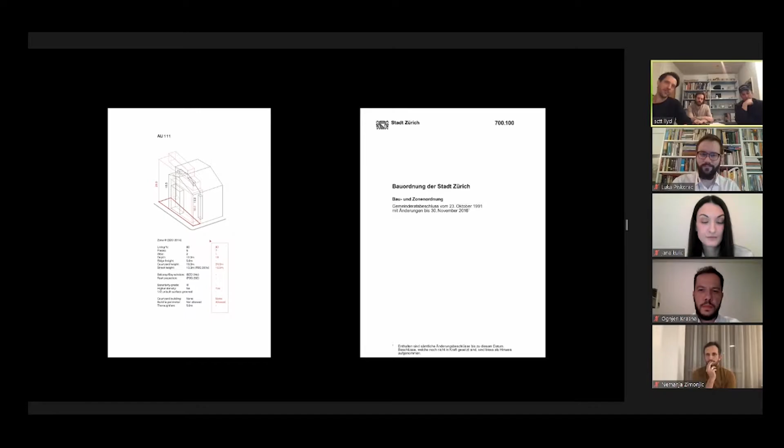On the right, you see an application of a similar procedure, but using open data sets from the city of Zurich and from OpenStreetMap and the kind of data which we come across. Again, we're pointing the machine, in this case also with some scripting, to these open data sets to try and solve a particular problem we see as fundamental to architecture, and that is housing, in particular affordable housing. We think that if we can do this type of research with the support of these technologies, we may get a little bit closer to cracking some of the key generational questions which are present right now.

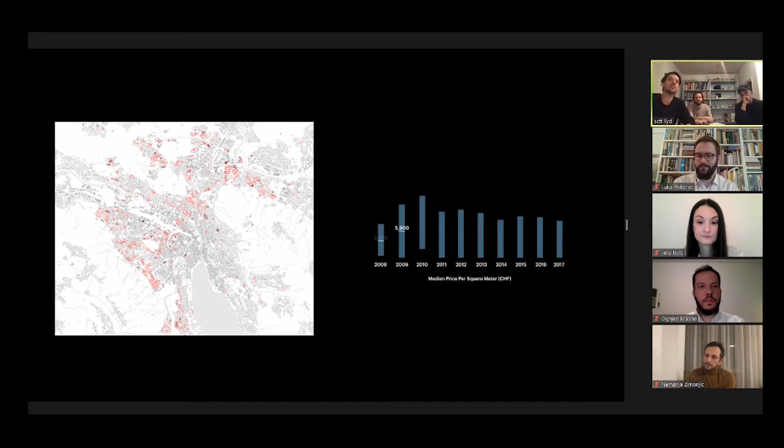And that referendum will never be met, this 33% target. We also note from our research that there is an incredible amount of capital investment coming into real estate. The house is no longer a house for use, it's actually a house as a product. It's a financial product.

And that's really distorting how people can have access to affordable, livable units in the city center, well-accessed housing. It's also quite a paradox that in Switzerland you have 80,000 apartments which are actually empty because they've been used as an investment vehicle, built but then left, and they're basically on the books of those who are investing in them. So this type of issue is something which we think is fundamental to our work.

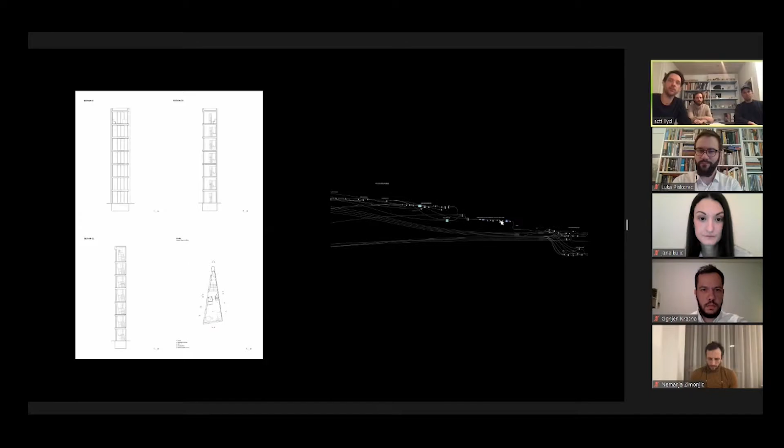So what we've been doing is working on scripts which take the open data and crawl through the data we have on the city to try and locate areas within the city which are easily built in a kind of very small studio-like fragments of architecture. The point for this is that there is a huge demand for the studio apartment, for the changing demographics, pointing more that architecture fulfills this type of market demand and less of the 3.5 bedroom apartment, which are being churned out every month in Switzerland.

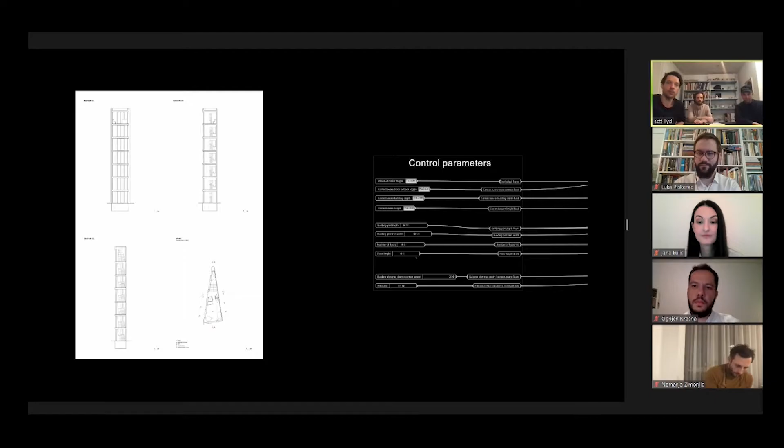So what we're doing there is looking at the city. We understand that the city has no more sites left for large-scale cooperative or non-market housing. And what we're proposing is, if we can find all of these sites, we can propose a small studio-style cooperative housing. And what's interesting about Zurich and about the cooperative scene here is that there's been incredible innovation in architecture and cooperative living.

It's not just about the housing. As you can see here on the diagram on the left, that's Kalkbreite. It's one of the leading cooperative housing developments in Zurich. It's housing, but also the shared services which comes to that.

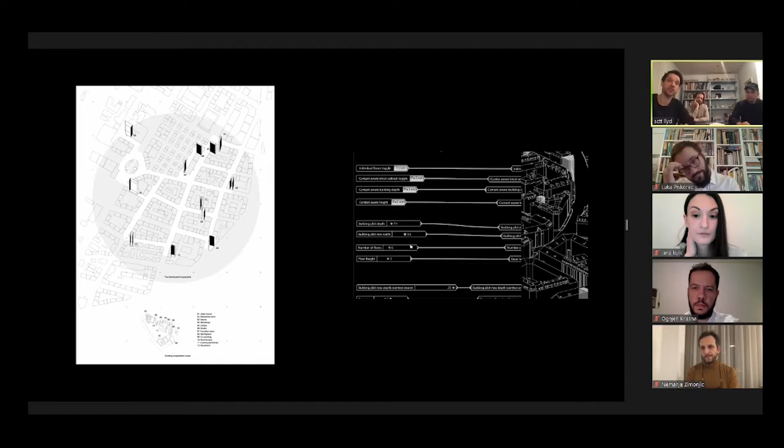So for example, we're proposing that because there's no more large scale sites in Zurich, we will use smaller sites and we will distribute a cooperative over a 5-minute walking distance. So for example, in the cooperative, if I have a health room, or a yoga room, or a co-working space, they're all distributed in one of these cooperative fragments, and that's called the distribution of this, and we use the public space to connect all of those fragments together.

We took this project on as a challenge on that level, also to present. We were invited to represent Zurich, to present this idea at the Biennale, the Seoul Architecture and Urbanism Biennale. And to do that, we wanted to show this idea of the shared spaces which connects all of these distributed cooperatives.

And this one here, for example, is a showroom, a shared showroom where you could go and receive items and then try them. It's something of a communal center as well. And to do this, we didn't want to go to Seoul and present the compact living which we're developing in this project, but more so on these shared spatial assets.

To do this, we put together an internal competition, which we all did in the team, and came up with some very tight, very beautiful small spaces, which could be then shared within that distributed cooperative.

On the left here, you see this could be like a pad, like a very elaborate, beautiful bedroom, which you could then reserve for a weekend, but then actually you live in a smaller, compact housing unit as part of the distributed. And here we built, for all of these images, they were meant to be projected onto one-to-one in a room size.

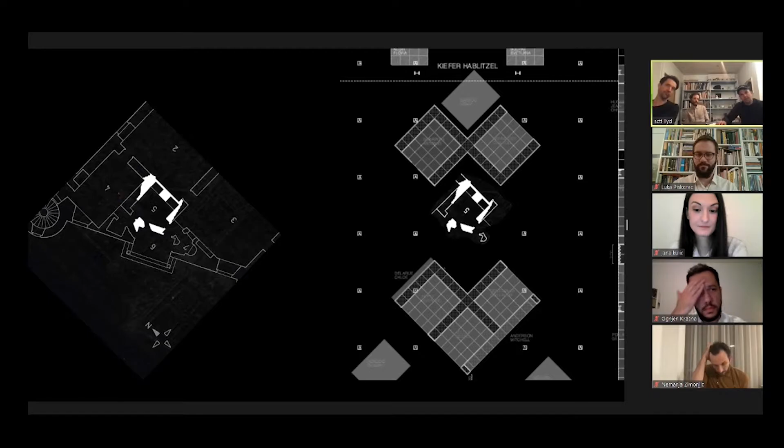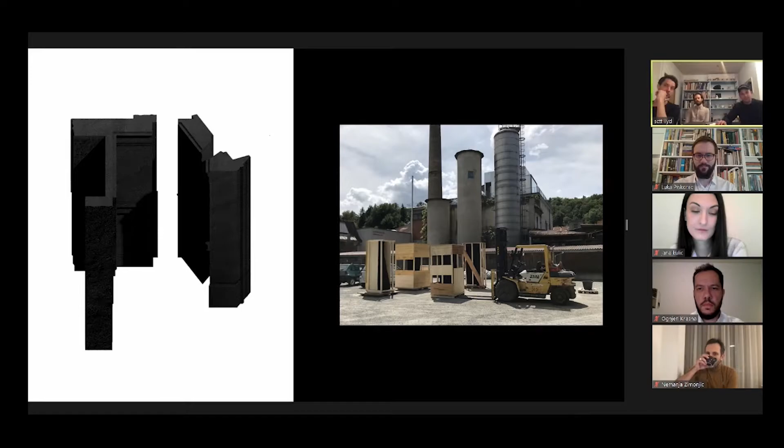This is where the process arrived. I think we became conscious of it being it, and it having to be transported from St. Gallen to Basel, which was also something to be nervous about. But it all went well, and very quickly it was there, and we all perceived it in the space.

And of course, not just we perceived it, but also standing there on these openings, people asked me, and I'm sure everybody too, well, what's the topic? What does it mean? And I listened to my colleagues explaining it, and I realized I was explaining it quite differently. This is something which is, I think, very nice, and you have to value that each of us can speak differently about this piece, and have our own story about it.

So this one is one of mine. I believe what we created, or I could read it as two kinds of spaces. Space meaning as something that evolves out of relation of parts, meaning that we have a virtual space, which is the relation of images, ideas, a discourse that we share among us, that we grew over the years, and at the same time creating a physical space that has a loose center within, but has no fixed boundaries and radiates to its limits.

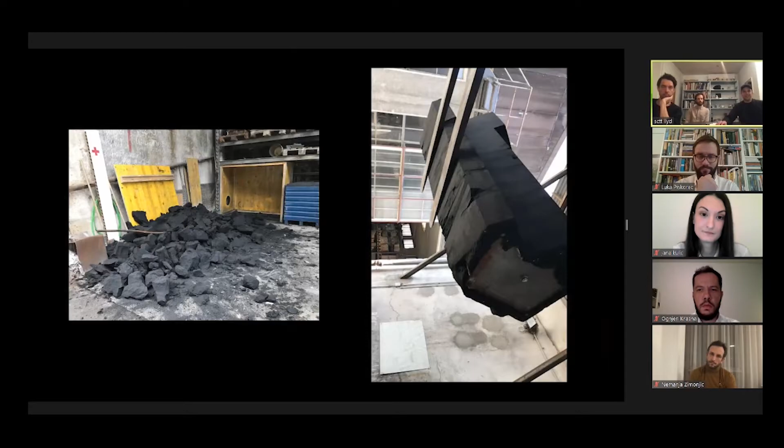And then this material, this sand, had to be reused. It was only borrowed to us, and it had an amount of value. So it took its next cycle and became destructed. So almost like a force of nature, this is exposed to transformation. And in that case, sadly enough, it was gone, but of course we were aware of it and we liked it.

Yes, please. Which would bring us to the next project. And we often, I think it's really part of our practice that we start anew and rethink things we have done, rethink what we see.

And I think it's these simple questions that come out of these restarts that arise, that also fascinates us. And this one would be, where do things come from? And in a material, or in a question of matter, this area is quite fascinating.

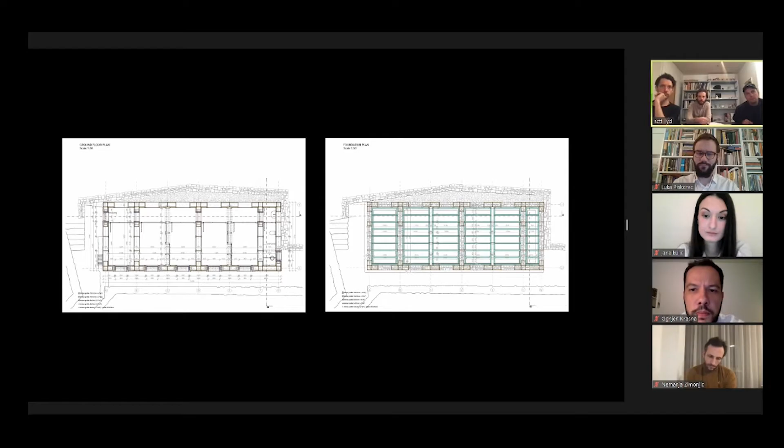The material was used in the most possible and most efficient way. The brief had the main objective to create buildings that would offer better security against earthquakes. One of the bigger problems is actually called wall delamination, which means collapsing parts of the walls could hit people and hurt them.

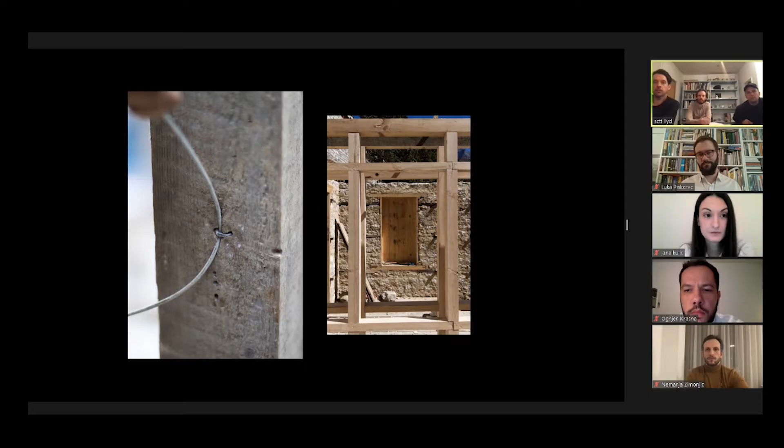So we developed a textile structure with metal thread that was weaved around the building, connecting wooden parts with the mass of the stone, and also giving a response to other kinds of impact problems of earthquakes.

This metal thread was applied after it was built, and it was something that left us with a big fascination, because it would disappear completely and become invisible, while still being the most significant change in the local building technique.

In that sense, the project has its secret, and in a way there's not much left to see when you actually get there of the main impact or the main design decisions.

So structural knowledge and using our knowledge as engineers is embedded in most of our architecture designs. In contrast to the invisible structure of the monks' dormitory, here lies another project that we did, which is very direct and very visual, using structure in a completely different mountain landscape.

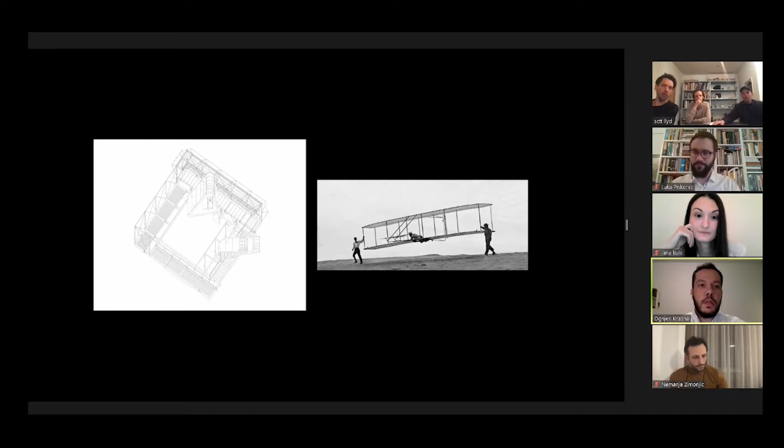The design in this project is used both ways, we used it to play with stability, to play with the program and question the program of one house, and with the boundaries of living between the house and nature. This is a project of a house, the Pavlova House.

It is a residence situated in a landscape of the Pavlova mountain near Belgrade in Serbia. This is the project that was nominated for the Mies van der Rohe Award.

Every element of the house emphasizes the performance of structure and space, and provides either weight or lightness at a specific point, or either expanse or contraction at other points. Examples of these are visible joints of the main steel frame and the connections to the bearing points, and exposed bracing and raw material finish.

Most elements of the house are designed as structural elements, and this allowed us to play with the spans and with cantilevers of the structure. All details are revealed, and this directness in the making makes the house understandable and accessible to all. It is organized in a 3.2 meter grid frame.

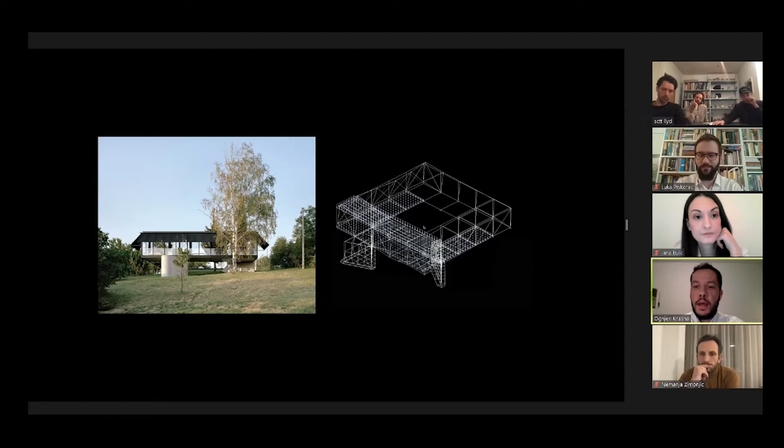The outside measures are 16 by 16 meters, and the inside courtyard is 9.6 meters. The whole frame is made out of 80 millimeter square steel tubes that are mostly welded in place. This steel structure is fixed to the ground through a minimum of three landing points.

These are the three concrete elements. One is hidden in the ground, and two of them are actually concrete elements in the garden. These elements in the garden are either the staircase from the garden to the house, or actually a storage space and the bathroom for the garden.

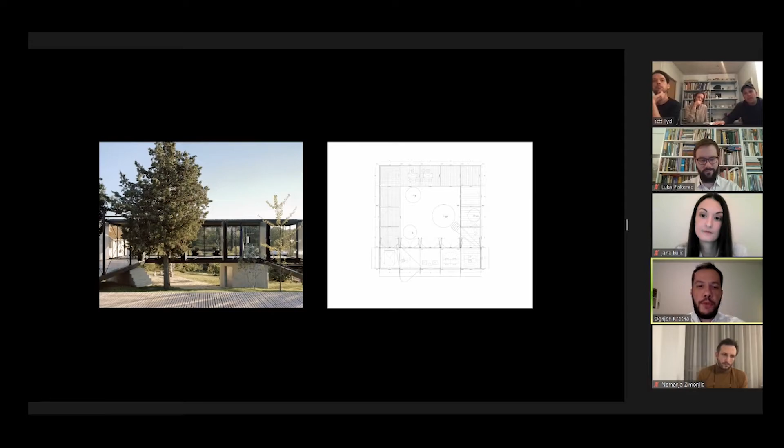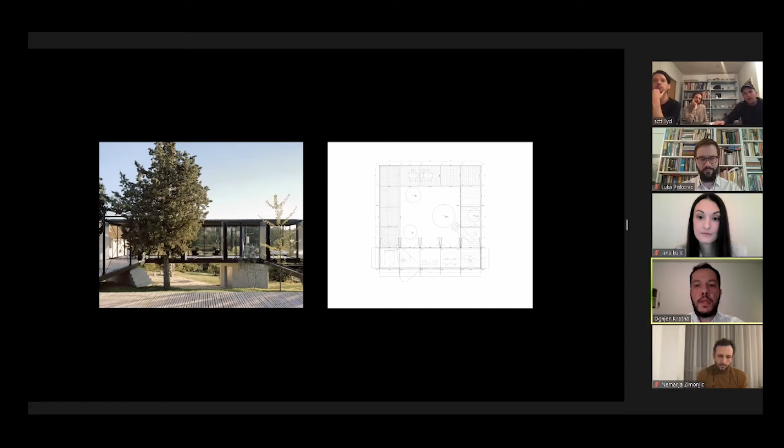This open frame that you can see in the image and the plan, in designing the structure, gave us the opportunity to play with the program of the house, and the surrounding surface forms both the inhabited area of the house and erases the limits of the building perimeter.

The house is, as you can see, a single-story space built over the existing inclined garden. The main floor is actually a new level within the topography of the existing slope, and it overlooks the surrounding forest.

This open structure embraces the immediate landscape and sets a new geometry and strong architectural outline. It is designed as a sequence of 4 terraces, and the house can expand from the interior space, which is about 50 square meters, to the exterior space with terraces, which is 150 square meters.

Also within the interior, when you use the space, either you use a bathroom or a kitchen, the program that you use fills the entire volume of the house, because there are no partitions inside.

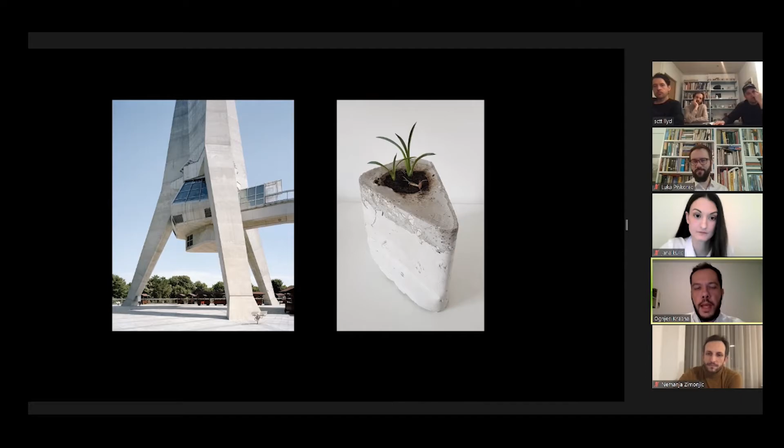It also brought, this is an example of how drawing translates into living.

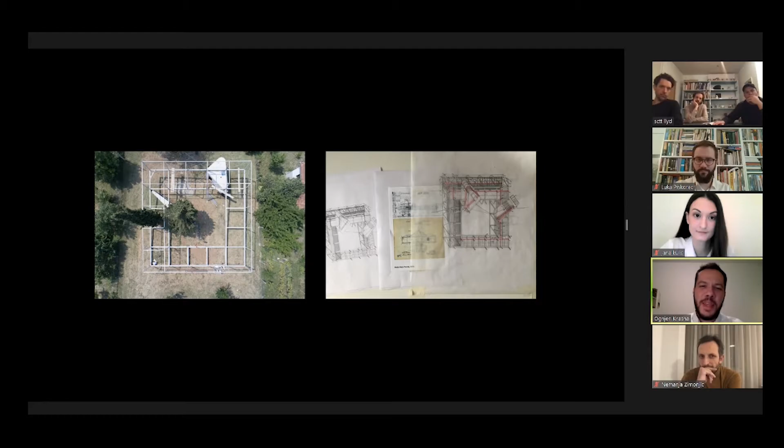And this conversation also brought solutions to the casting on the site of the exposed concrete, and using, for example, the recycled metal sheets for the round corners, and using the wooden panels for the walls.

We designed the formwork ourselves because there were no big companies involved in projects that could do this for us, but we actually needed to learn how to do it, and to find out how to use self-compacted concrete and how to make the formwork strong enough to hold the concrete.

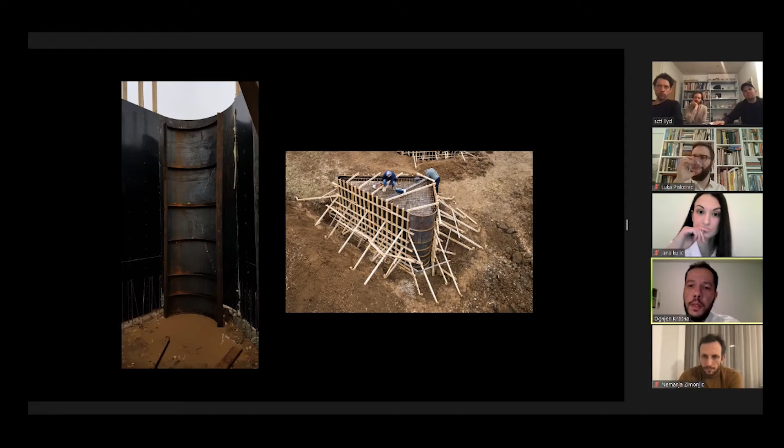Here you can see how we actually also learn from the site, and how we are inspired by the site, and how we translate things we see during the construction into the interior in this image.

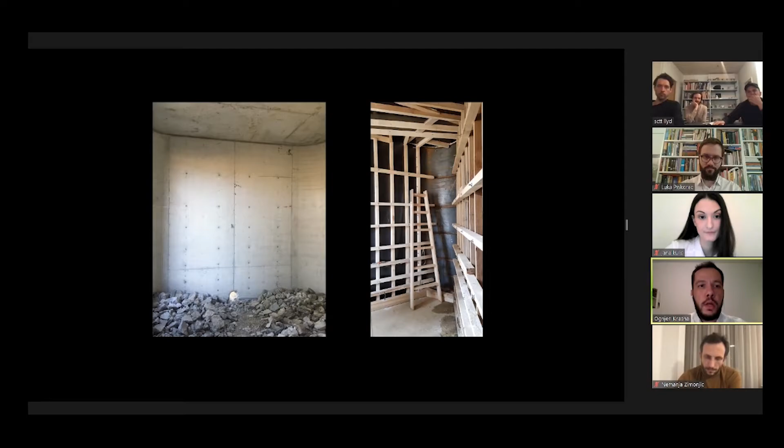The accuracy of the formwork, working with Zocchi and working with his workers, gave us the opportunity to experiment with the way things were built. The concrete is really smooth, but it's because the guy who was really good with painting interiors filled in the gaps in the formwork while we were doing it.

This experimentation in the procedure of construction offered, as I explained, new applications for local construction skills. All the details left exposed.

They reveal the proof of labor and skill by the people driving the construction, and the formal impression demonstrates the human factor in production of the house.

This is actually, you see the images from the construction site, balancing the structure. And there is a lot of stories and people involved in the building of the project. For example, one of the stories from the neighborhood is when people passing by said a bridge is being made in the neighborhood.

Yes, I believe this storytelling was a really big part of what this house means throughout its life. I think it reflects the wonder of how the house was made, with what skill and knowledge and craft. But as the end result emerged, we got this mystery of who this house was actually made for. Even though it was local craftsmen who knew each other that made this house, people still talked about this being a house for a football player or a famous person.

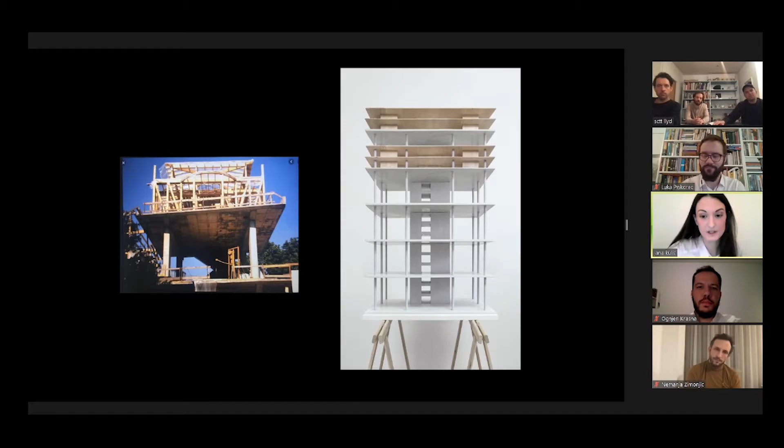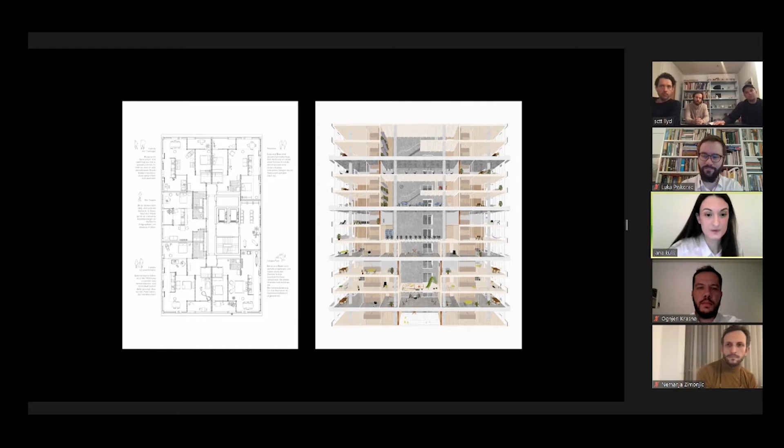It was actually the knowledge of the structure and engineering that unlocked those constraints and opened up possibilities for additional programs and imagining how this high-rise should work. It created communal spaces as a spine that connects the predetermined program. The way it was built enabled a raw structure containing 3 floors each, with a wooden structure in between, which means this high-rise could be easily changed, and is also more ecologically efficient in the long term.

In this type of building, the interior itself reflects how it is built, so on each level you get a sense of where you are in the building. Out of the 3 floors, the one on top is actually more flexible because you don't need any construction there due to the steel or concrete columns that carry it, which opens possibilities for different uses.

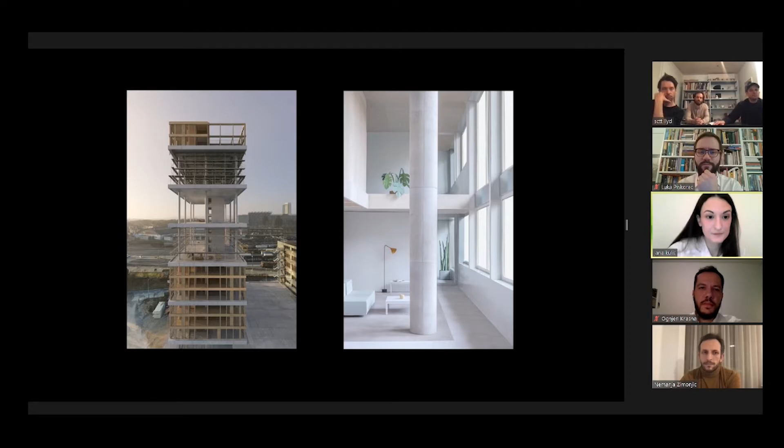So what do we know about high rises and skyscrapers? Once you design one, you have to look into the history of them, and there are no direct answers to be found. But what's really exciting is to find values that you can translate. Not to make a conclusion out of our talk, but to draw a few values that we really go back to when we speak about design and for whom, and societal issues.

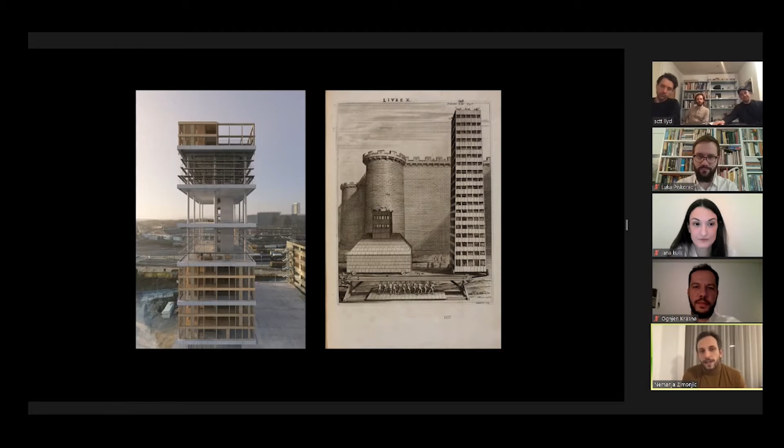We're not really academics and we're not historians, but we worked very closely with the historian Emma, with one project completely dedicated to annotation between us. That also led us to understand how we can read from history. What we're really interested in the design process is the main idea, the main outline, because once we set that outline right, it doesn't matter if it's the Renaissance workers like Alberti, or if it's Zocchi filling it out. Of course, we're in the middle of it, we're not standing away, we're actually throwing ourselves right into the microscopic.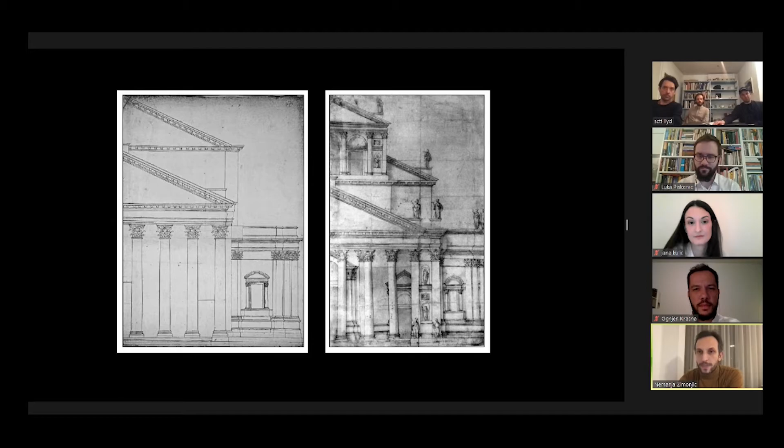And there, when I say draw, or when we say draw, it is a fine line between how something is drawn, whether it's drawn as on the right side, a trace of a shadow, or as on the left, where you are actually designing and guiding that shadow, so it translates into a more careful design.

But design, of course, is not just created, it's also inherited. And design is always only reimagined. It's never finished, it's only evolving.

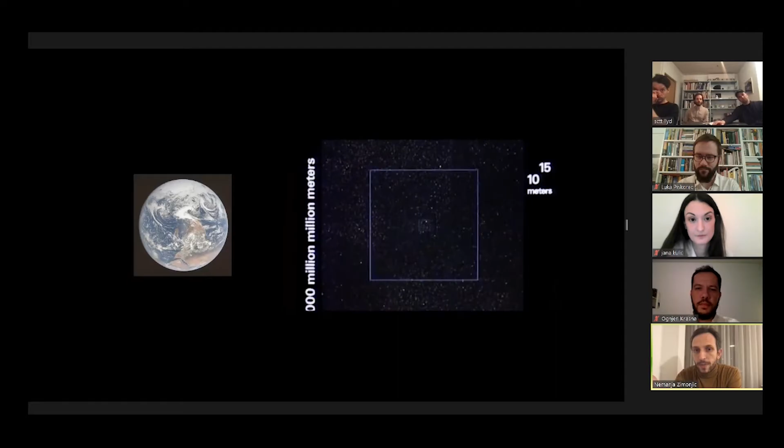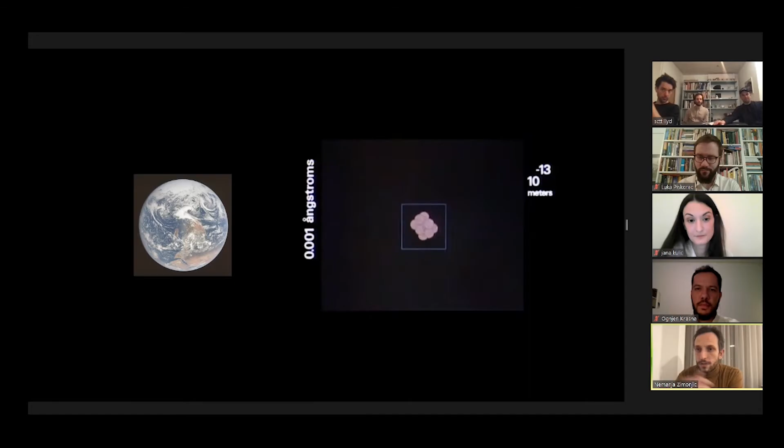Once we design, you all know the Powers of Ten by Eames. When we design, we really try hard to set the questions in each project so we can enter multiple scales and find these analogies between projects, but also within projects, that provide multiple stories and histories we're interested in, both individually and collectively. Our individual expertise allows us to do that.

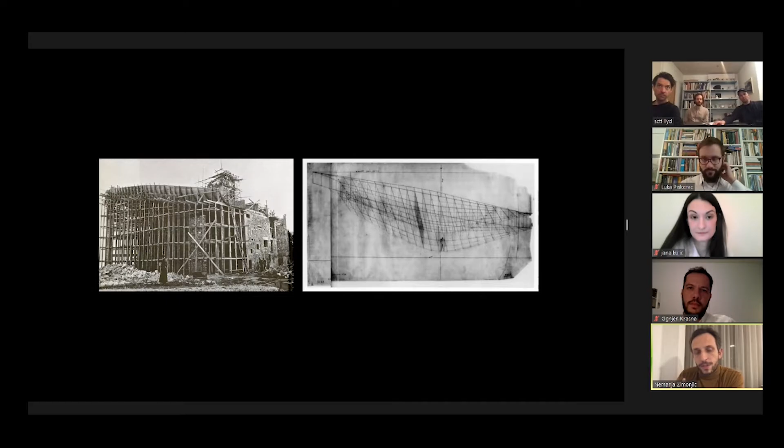Much like in Avala, looking at Rorschach, we love the translations, the translations from drawings to formworks to buildings. That's something we'll continue to work with, because it captures the imagination even before something is finished. Now I'm coming to a closure.

The directness of an idea, the directness of that outline, for us serves only to throw ourselves in, but also to engage, and I could use that word now, infect others on site, to really show and share and capture that passion, so that what we do and what we practice gets executed in the same way.

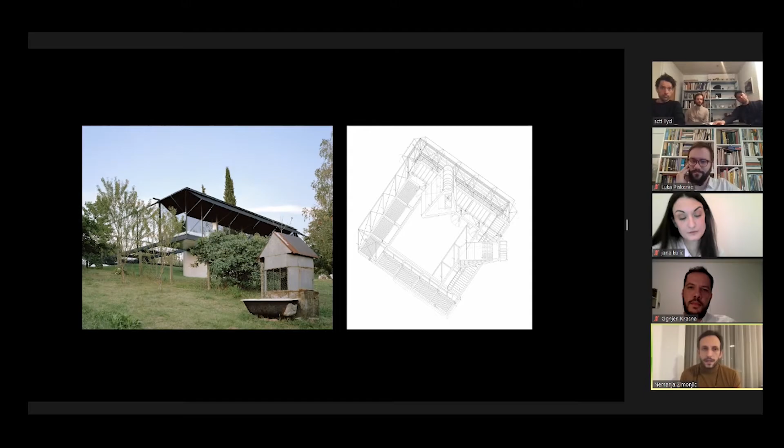This black matter, as Nico mentioned, forms for us into all types of possible stories and floor plans, in our opinion all buildable, because that's really what we believe: that our work, especially architectural work, is at its most powerful once it's in the form of a buildable idea.

To quickly annotate one of the people we follow, or could call heroes, Michael Heizer. We're living in a world that is technological and primordial simultaneously, and the idea is to make architecture that reflects this premise. With the next slide, we're sharing that open question amongst us, and that's also something we cherish a lot.